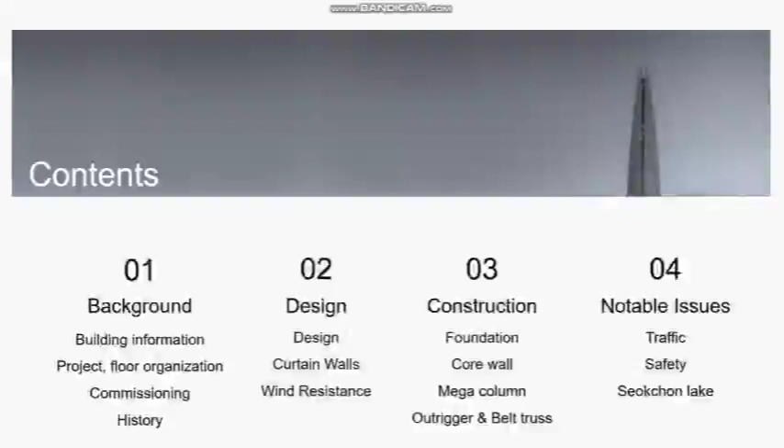Let me tell you the table of contents first. First, let me tell you about the background of the building, and another member will talk about the design and structure of the building and notable issues.

First, the background of the building. Let me tell you why we chose Lotte Tower. Lotte Tower is the 5th tallest building in the world and the tallest building in Korea. And I thought I could study many construction skills as a skyscraper.

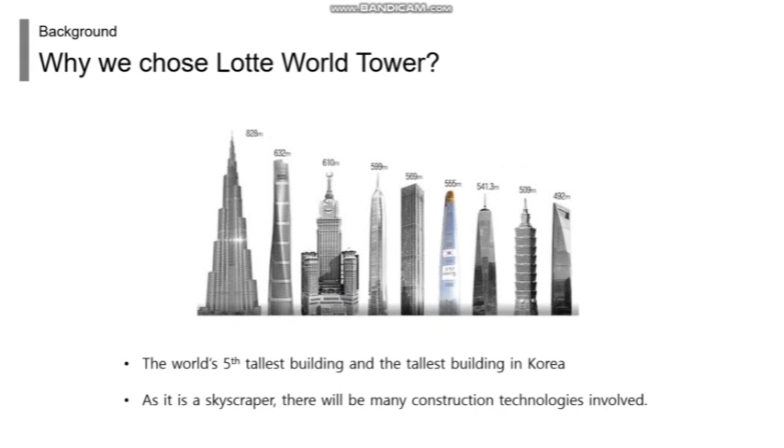Next is the basic information of the building. The building is located in Songpagu, Seoul and was built for a total of 6 years. And it is designed by Kohn Pedersen Fox.

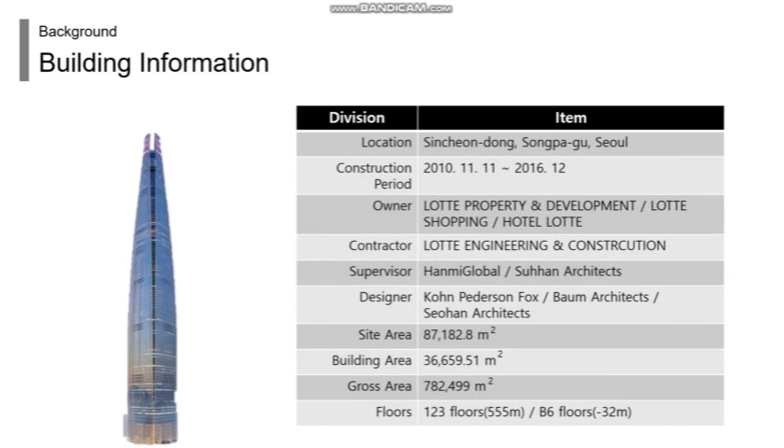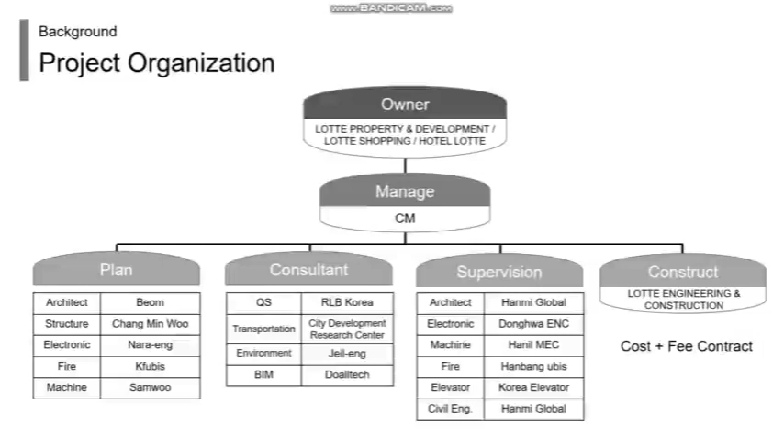Next, I'll talk about the project organization. This table shows who the owner and the manager are and which companies are responsible for plan, consultant, supervision, and construction under them.

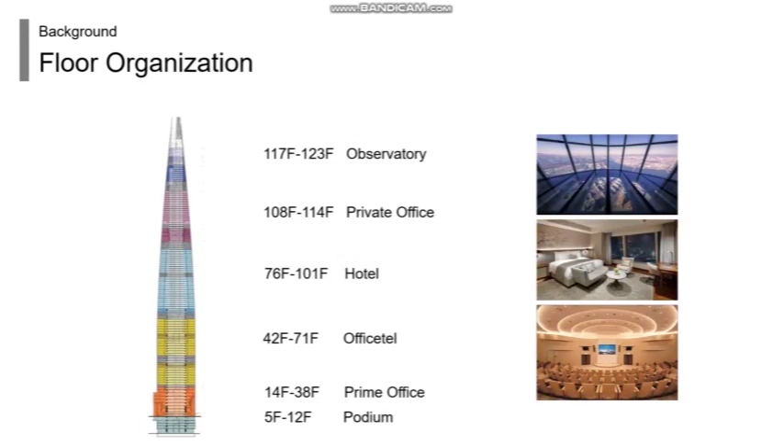Let me tell you about the floor organization. First, if you look from downstairs up to the 12th floor, there is a lobby and complex service space, and above that, there is an office. From the 42nd floor, there is an officetel there, and above it is a hotel and private office. The last section consists of an observatory. So, Lotte Tower has 123 floors and 6 floors underground.

Next, I'll talk about the history of Lotte Tower. First, let me tell you the history of building permit. In 1987, Lotte purchased the site of Jamsil in Songpagu, Seoul.

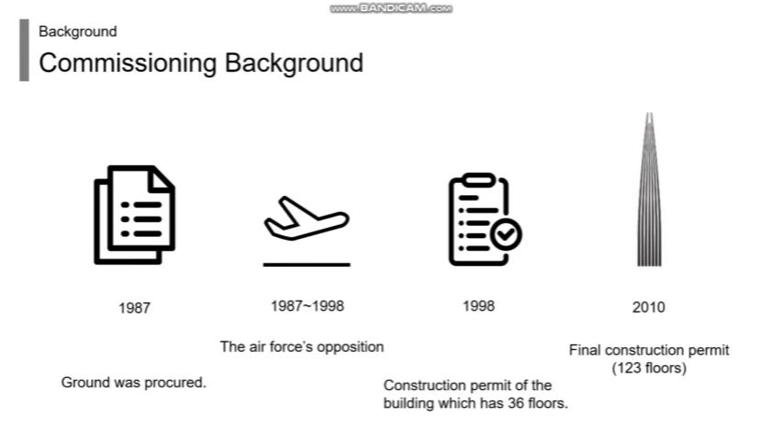However, construction failed in 1994 due to runway problems at Seoul Airport. Then, in 1998, Songpagu office granted a 36-story building permit. But in 2002, the Ministry of National Defense opposed the construction of the 112th floor. Finally, in 2006, the Seoul Metropolitan Government approved the construction of 555 meters, and in 2010, Songpagu authorized the construction.

And this is about the construction process after the final permit. First, we will start the mat foundation in 2011 and start the construction of the frame in earnest in 2012. Next year, install the outrigger and belt truss.

In 2014, it will surpass 305 meters and 410 meters in 2015. Eventually, in late 2015, the topping out ceremony will be completed in 2016 with the last beam raised to 123 stories. So I talked about the history of Lotte Tower's permit process to completion after construction process.

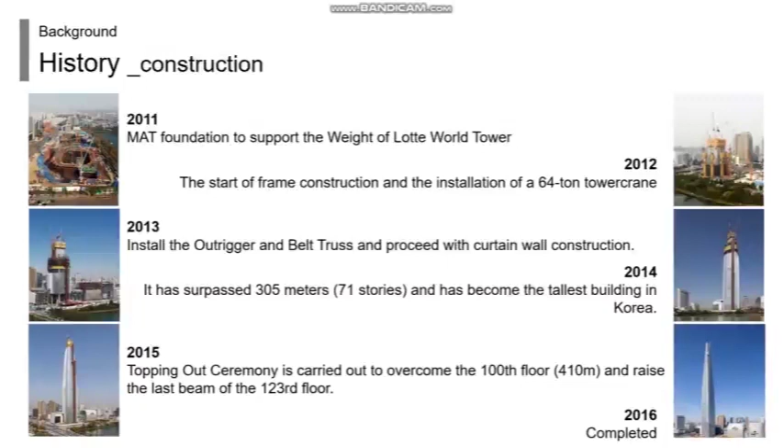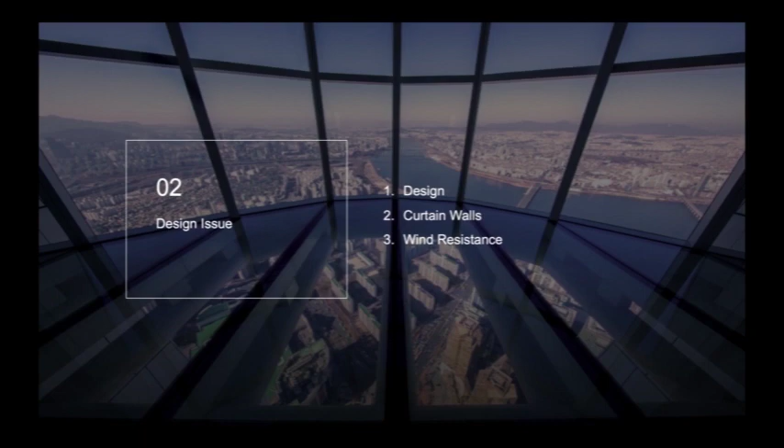This is Intang, and from now on, let me tell you about design issues. First, Lotte Tower's appearance is motivated by the shape of pottery and brush.

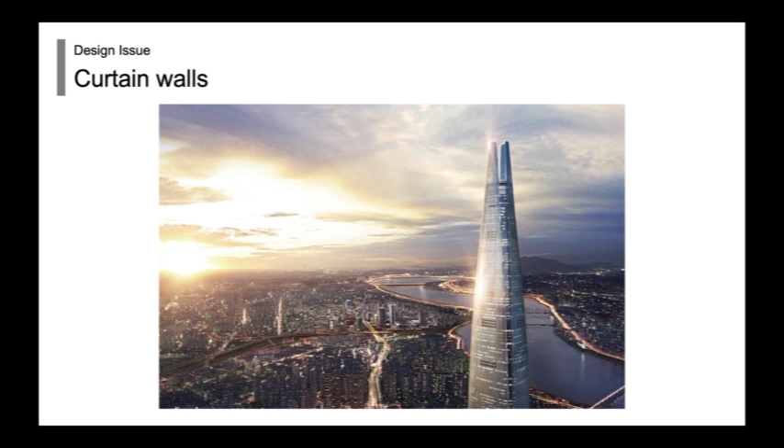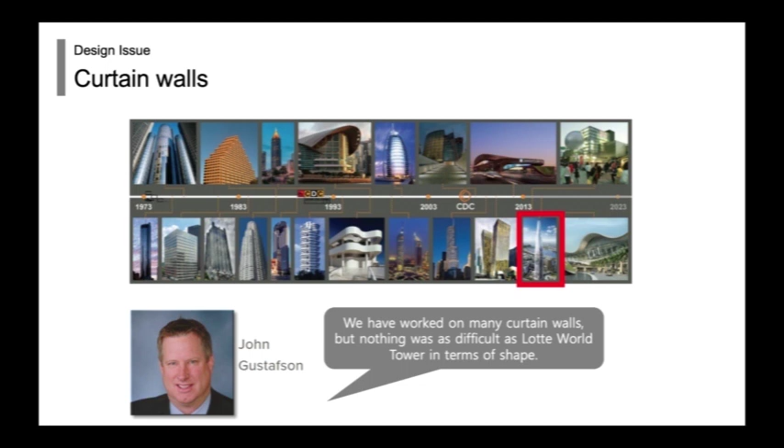So, to express the soft line and 2 lines of notch section, a lot of curtain walls are used. John Gustafson, president of Curtain Wall Consulting, said that he had worked on many curtain walls, but nothing was as difficult as Lotte Tower in terms of shape.

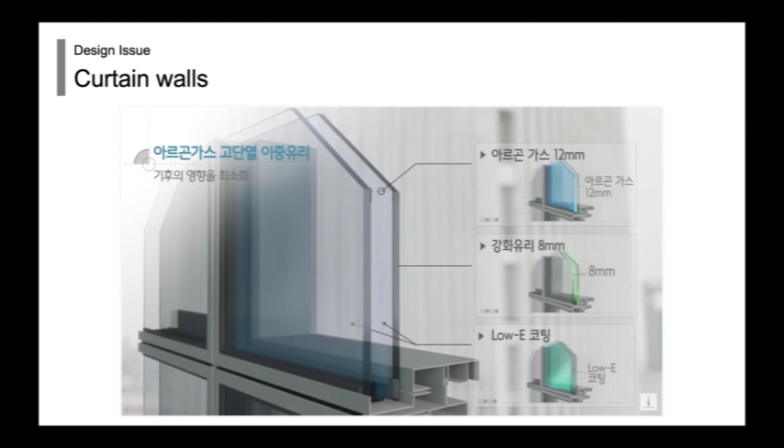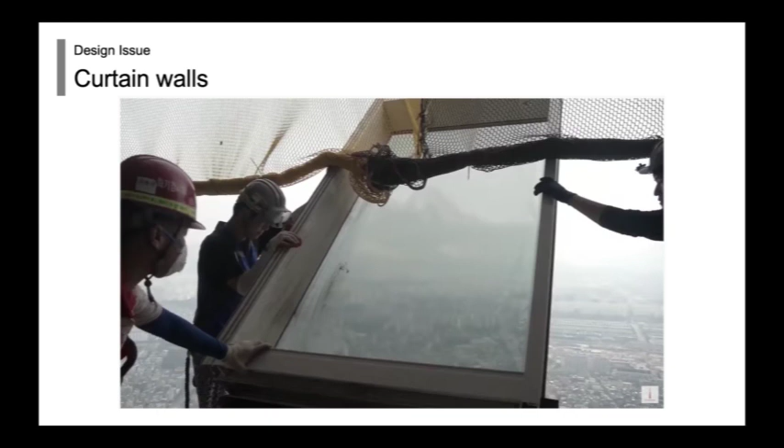The curtain wall has 12 mm of argon gas, 8 mm of tempered glass, and Low-E coating, which makes it strong and keep the energy inside. And there are 21,000 units that weigh as much as 600 kilograms. What's more surprising is that 17,000 of these shapes are all different.

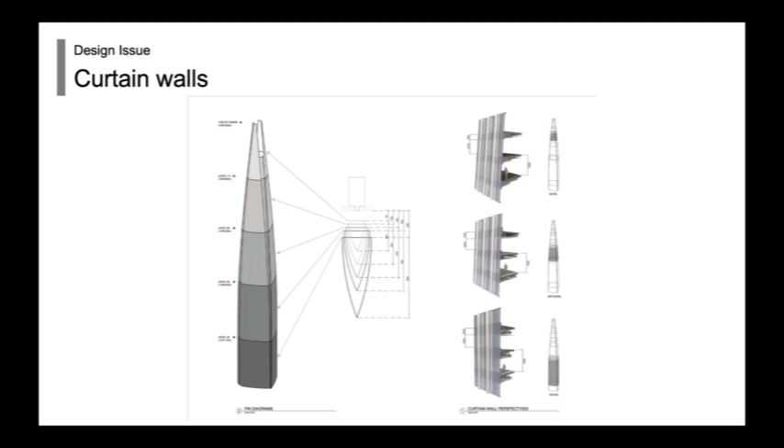As you can see in the picture, as the building is sloping upwards, all the points of the unit are marked on the entire floor of the slope section depending on the weight, width, and corner angle of the unit, which requires a high level of precision construction.

And another design issue is wind resistance design. Lotte World Tower was designed to withstand wind speeds of 128 meters per second. A series of wind tunnel tests were conducted, and the results were reflected in the structure design.

According to a research paper, after the 50% schematic design stage, a high-frequency force balance test was conducted, and the analysis was done twice at the end of the design development and after the 60% DD stage. During the 90% DD stage, when most of the dynamic properties were identified, an additional aeroelastic model wind tunnel study was conducted after the 50% SD stage and after the 90% DD stage, respectively.

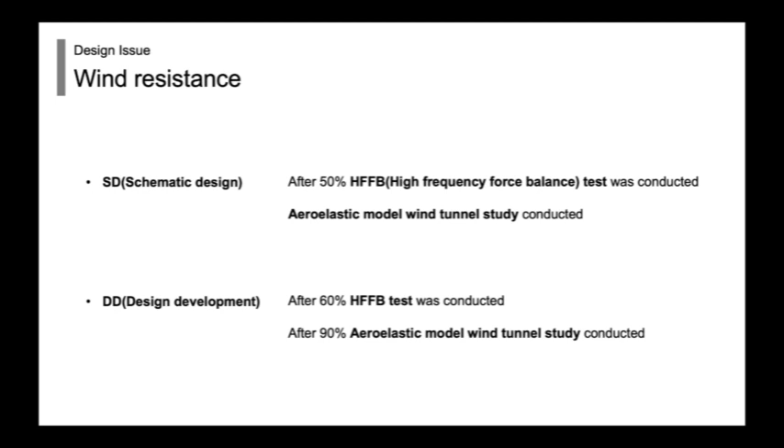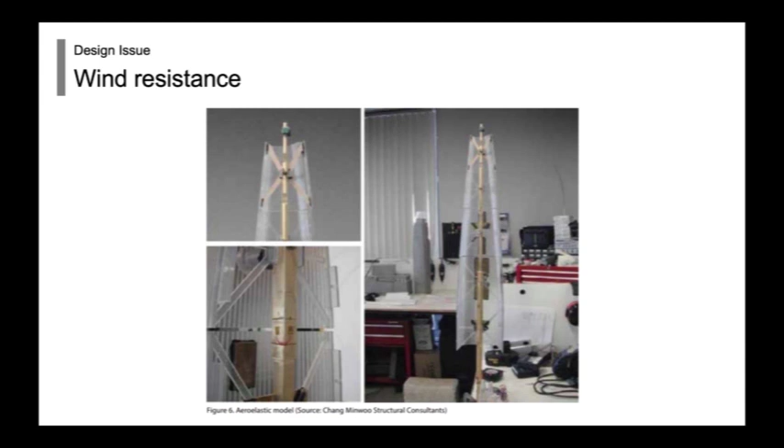The wind load calculated by the aeroelastic model showed approximately 17 to 22% lower than that by the HFFB. Base shears also came out about 8% below the HFFB. In the expert's view, the aeroelastic model study is a more preferred process. So, as a result, Lotte World Tower is satisfied with its acceleration limit and torsional velocity limit.

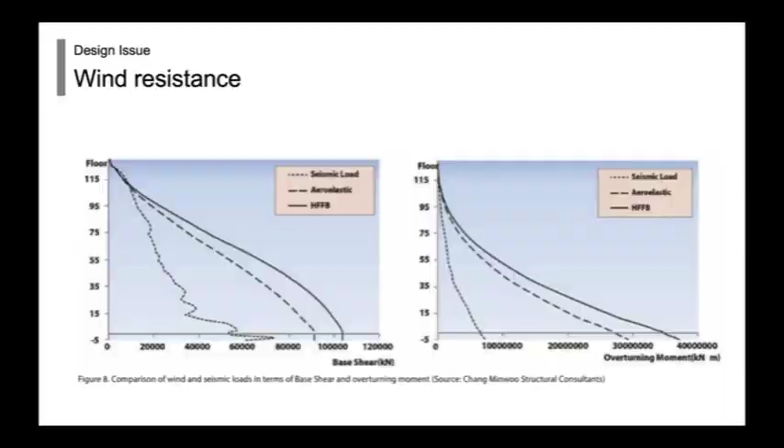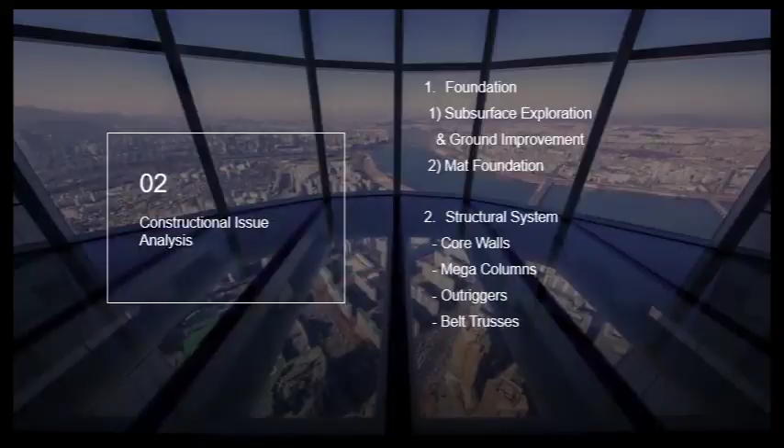Before starting the foundation construction process of Lotte World Tower, subsurface exploration was carried out. And then ground improvement work was carried out. The construction team dug under 38 meters and carried out ground improvement work by driving 108 PRD piles that have 1 meter of diameter onto these bedrocks. And these cast-in-place piles have 60 megapascal strength.

The main purpose of this work was to prevent subsidence of foundation and to reduce unequal settlement rate.

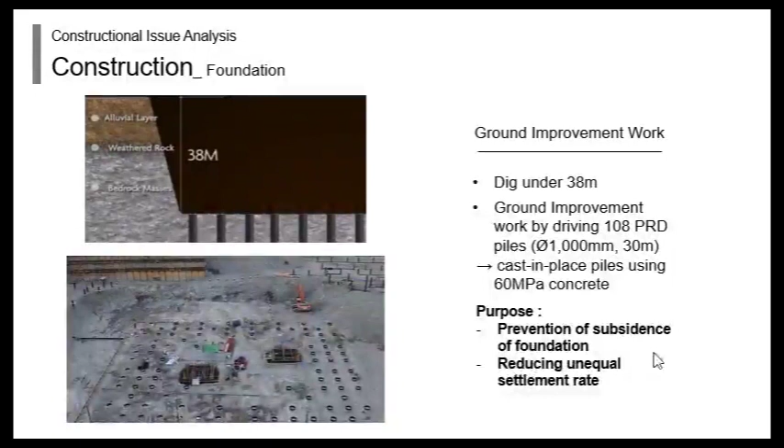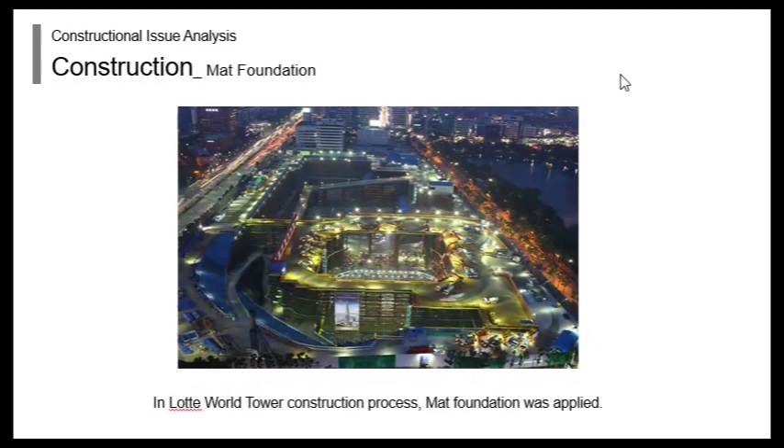After ground improvement work, foundation process was carried out. In Lotte World Tower, mat foundation was applied.

Before talking about Lotte World Tower's case, I will explain mat foundation. Mat foundation is a footing which has a continuous thick concrete slab on the soil that extends the entire footprint of the building and increases the soil bearing capacity. Since it can support the entire building loads and safely transfer it to the ground, it is suitable for heavy building construction or ground that has low bearing capacity. The main advantage of this method is that it is a stable foundation against unequal settlement.

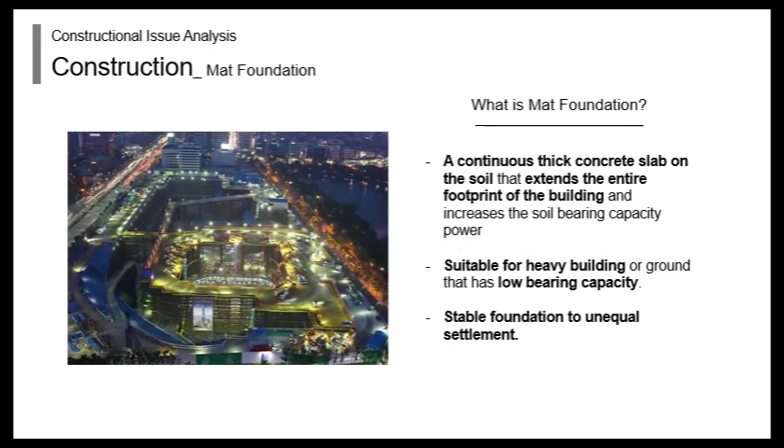This is an introduction of the mat foundation applied in Lotte World Tower. Its scale is 32,000 cubic meters and its casting time was about 30 hours. Consecutive concrete casting was applied during the process, and especially ultra-low heat concrete was used, which has 50 megapascal strength, and lastly, large high-tension deformed bars were used.

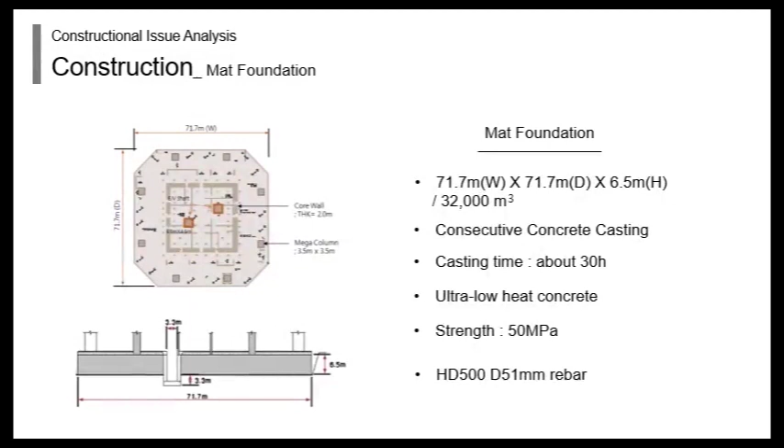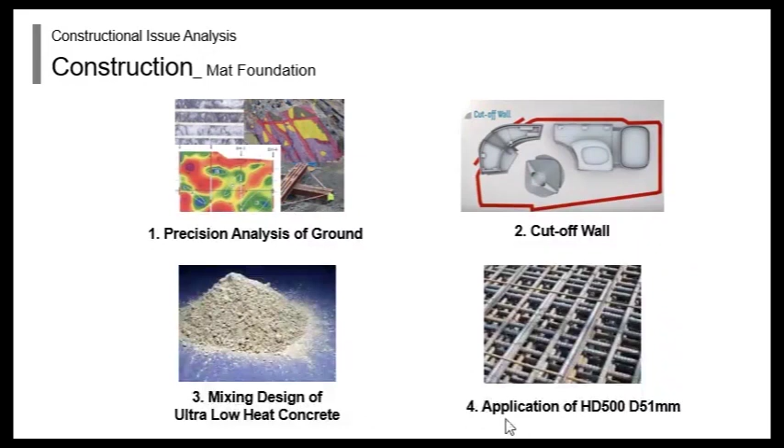In this process, mainly four methods were applied: first, precision analysis of ground; second, cut-off wall; third, design of ultra-low heat concrete; and lastly, application of high-tension deformed bars.

Before foundation construction, precision analysis of ground was taking place. This process was really important because Lotte World Tower is a high-rise building, and the results of this analysis can affect subsequent processes such as selection of ground improvement method and foundation method.

In this process, four analysis methods were carried out. First, core sampling analysis was taking place so the construction team could know the physical features of the ground. Second, face mapping process was carried out, the purpose being to evaluate the surface of the site's bedrock. This mapping process was collaborative work between Korean teams and foreign experts.

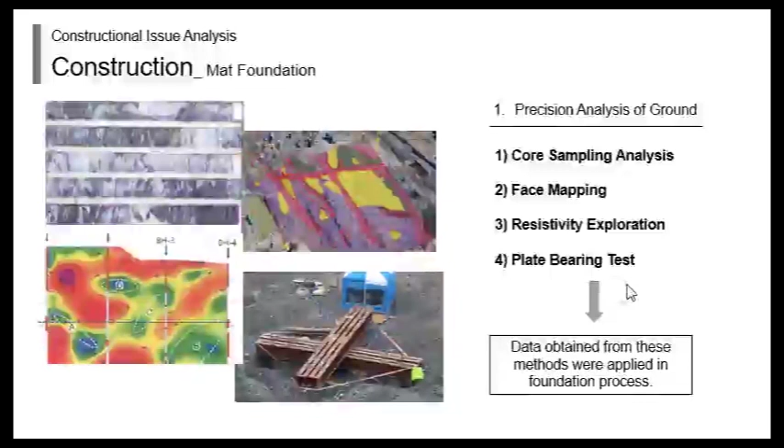Third, resistivity exploration was carried out so the construction team could assume the possibility of endurance-decreasing factors of the RC concrete foundation. And lastly, plate bearing tests that can measure the endurance of bedrock were carried out. Data obtained from these methods were applied in the foundation process.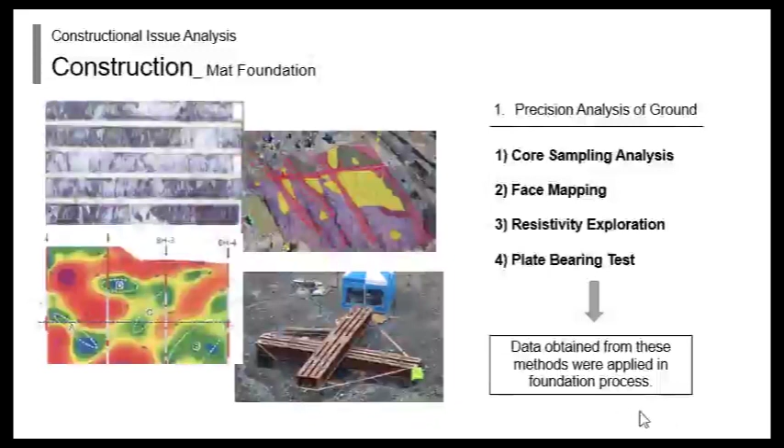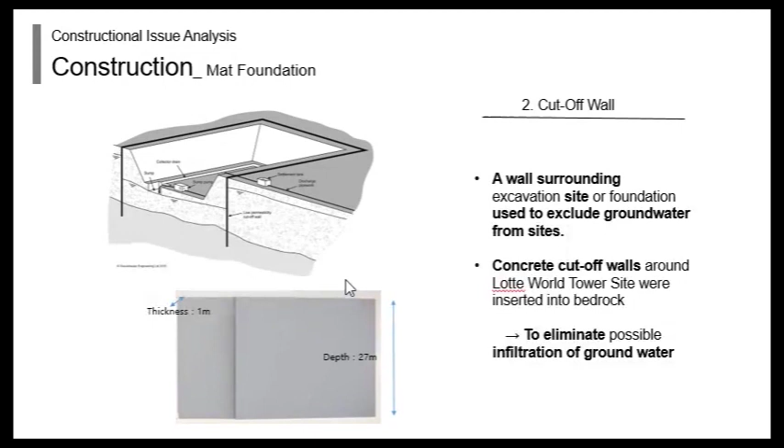The second main process of mat foundation was inserting a cut-off wall around the Lotte World Tower site. A cut-off wall is a wall surrounding an excavation or foundation site used to exclude groundwater. It can be made in various ways such as steel sheet piling or concrete diaphragm walls. In this case, concrete cut-off walls around the Lotte World Tower site were inserted into bedrock to eliminate any possible infiltration of groundwater. These walls have 27 meters of depth and 1 meter of thickness.

This is a short video of the cut-off wall surrounding the building. As you can see, these walls surround the entire building to keep it safe from the ground, like this.

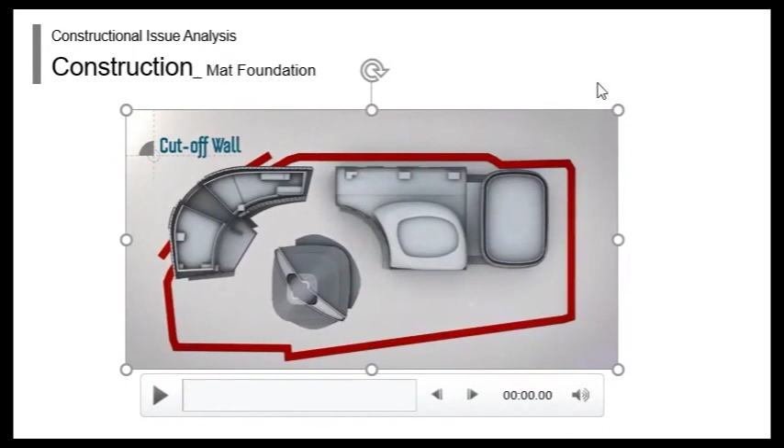The third main process of mat foundation was the mixing design of ultra-low heat concrete. Since Lotte World Tower was a high-rise building of tremendous scale, consecutive concrete casting was needed. In this mass concrete work, the chemical reaction called hydration can cause thermal cracking, which can lower concrete performance. So there were rigid requirements for mass concrete in the foundation.

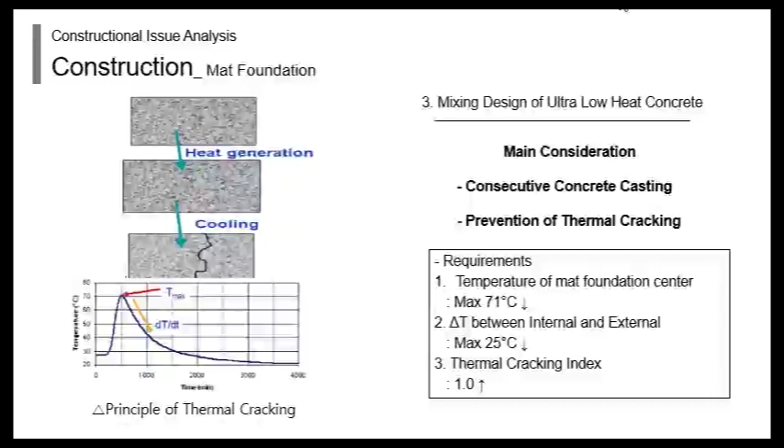To satisfy these requirements, Lotte E&C and Asia Cement collaborated, and after two years of work, a special ultra-low heat cement mix was invented. According to experiments measuring hydration temperature, concrete using this cement fulfilled the design strength of 50 megapascal and had a 50% lower maximum temperature compared to normal concrete, fulfilling other design requirements. This special ultra-low heat cement was used throughout the entire mat foundation process.

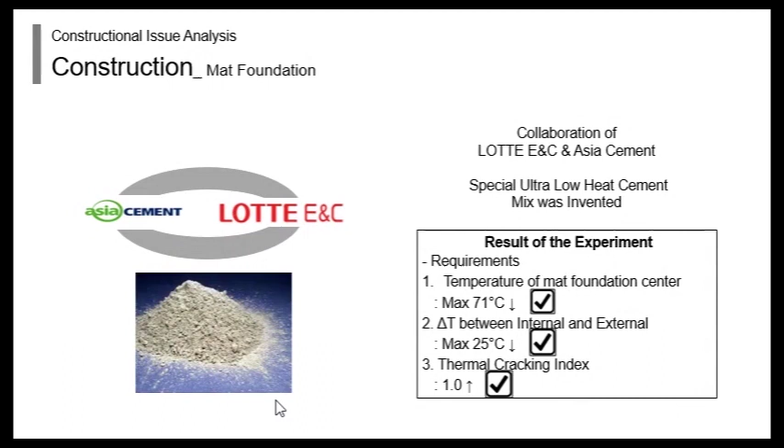Finally, the construction team used super high-tension deformed bars in the mat foundation. If we sort deformed bars by yield strength value, there are mainly three types: HD, SHD, and UHD. Among these, SHD bars with 51 millimeter diameters were used.

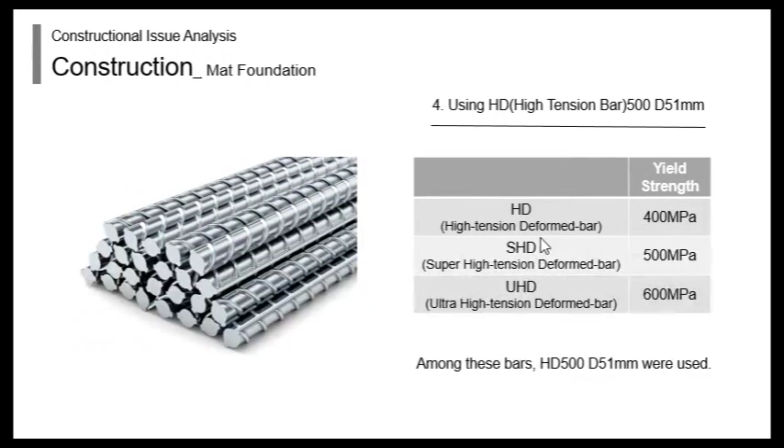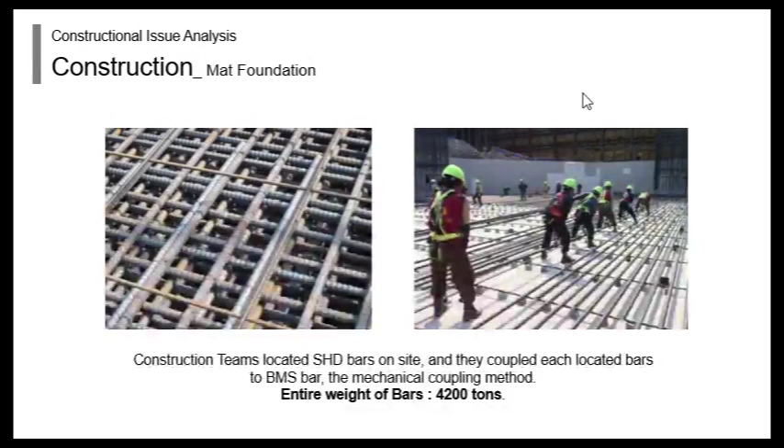Construction teams located SHD bars on site, and coupled each located bar using BMS bar, a mechanical coupling method for steel bars. The entire weight of the bars was 4,200 tons.

Thanks to the application of these methods, the mat foundation of Lotte World Tower was successfully constructed. It is roughly 1.8 times thicker than that of Burj Khalifa, using 80,000 tons of high-strength concrete, more than 2.5 times the amount used in Burj Khalifa.

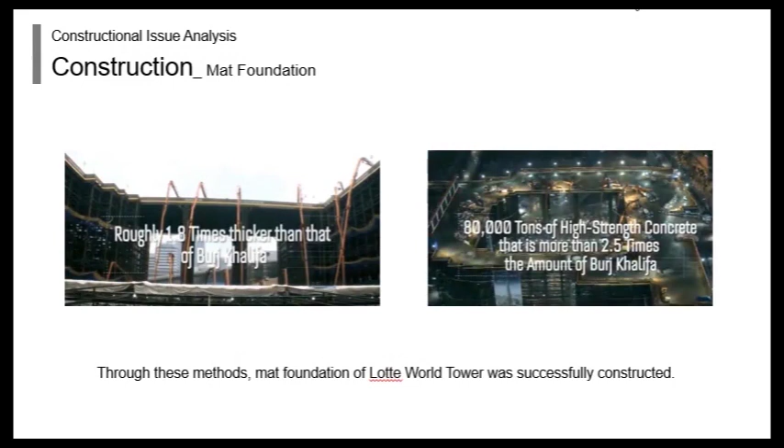From now on, I'm going to talk about the structural system of Lotte World Tower. There are mainly two systems: gravity resistance system and lateral force resistance system. Although these systems work together and cannot take each force separately, they can be sorted as specializing in each force. There are core walls and mega columns that specialize in gravity resistance, and outriggers and belt trusses that specialize in lateral force resistance.

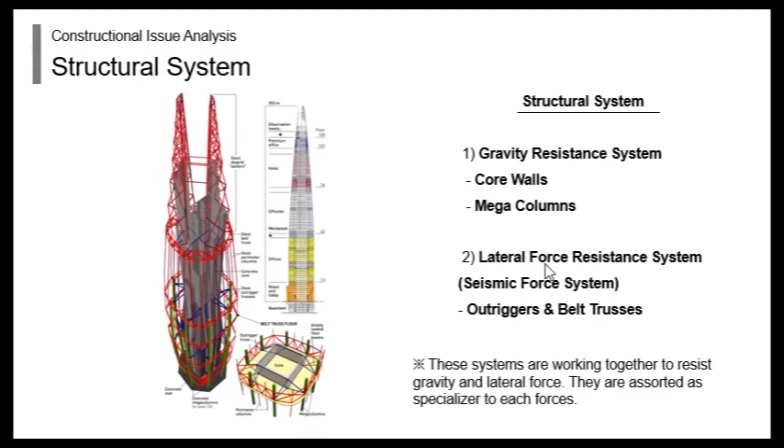First, let's talk about the gravity resistance system. As I mentioned, there are core walls and 8 mega columns that have an RC structure. This is a picture of those systems, and this is a table that shows the weight of each system's members.

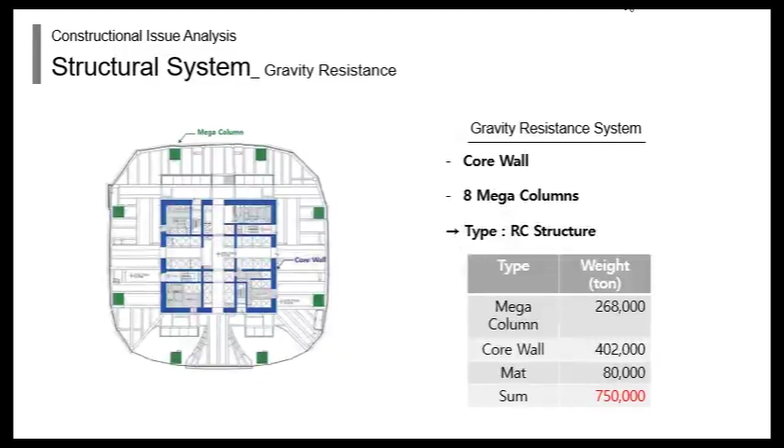When we see this structure in cross-section, you can see that these system members have different thickness on different floors. You can tell that toward the upper side of the building, the thickness of gravity resistance materials gets narrower. Since these are RC structures, they have between 40 and 80 megapascal strength. Concrete with more than 40 megapascal strength is called high strength concrete, but when you build a building using this kind of concrete, prevention for spalling failures should be considered.

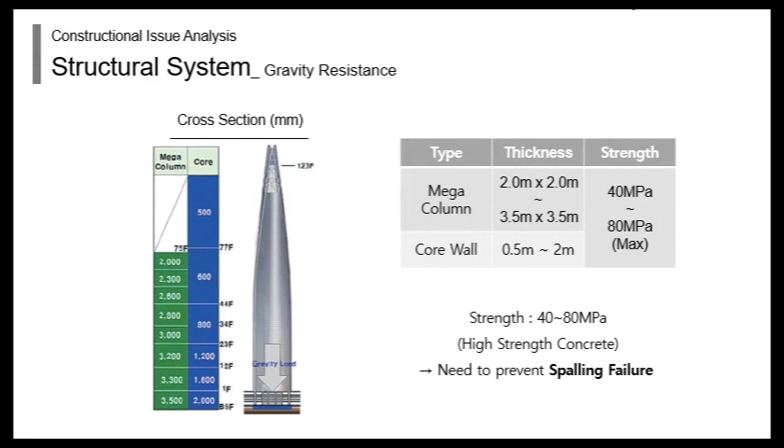Spalling failure is the process of surface failure in which flakes of concrete break off in fire accidents because of internal water in the concrete. For high-strength concrete, spalling failure can happen easily due to its dense structure. The main problem is that structural performance of concrete gets lower and can cause ultimate failure, meaning collapse of the entire building. In the Lotte World Tower case, polymix fibers were added to the concrete to prevent spalling failure by making tiny gaps that act as exits for water vapor.

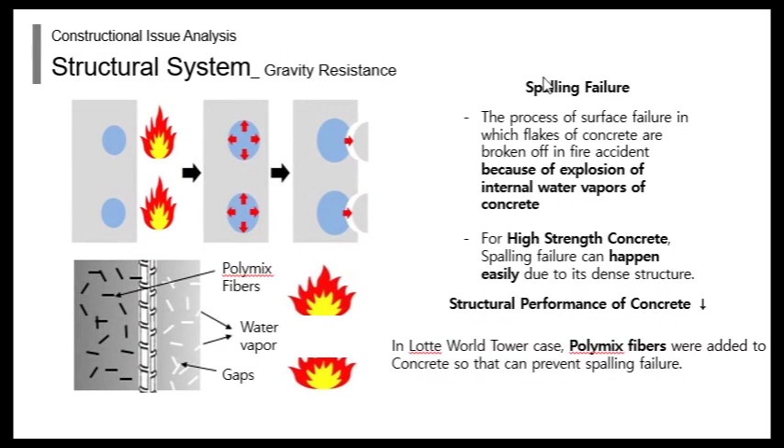This is an explanation of the gravity resistance system. Lotte World Tower's gravity resistance system consists of core walls located in the center up to the 123rd floor, 8 mega columns located around the perimeter of the building, and deck slabs with steel beams. These members are connected to each other and can disperse gravity loads effectively. In fact, core walls support 60% of building loads and mega columns support 40% of building loads.

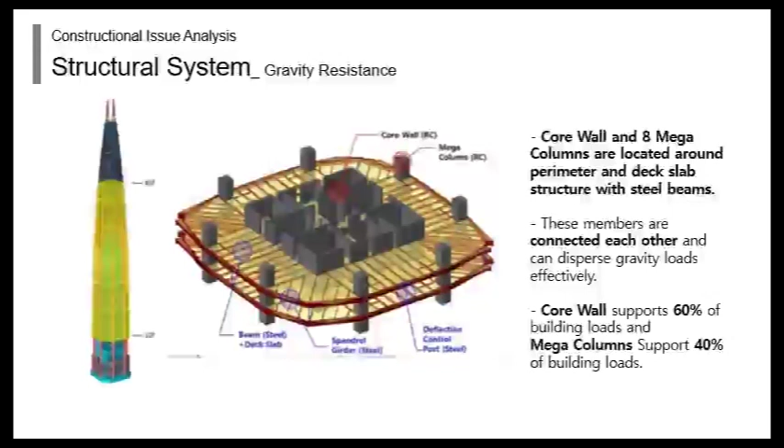As mentioned by Hyunmin, according to design intent, lateral loads on the building are resisted by the RC core walls, mega columns, outrigger, and belt trusses. Among them, I'm going to tell you about the lateral load resisting systems applied in the building: outrigger and belt truss. Outrigger systems function by tying together two structural systems, typically a core system and a perimeter system.

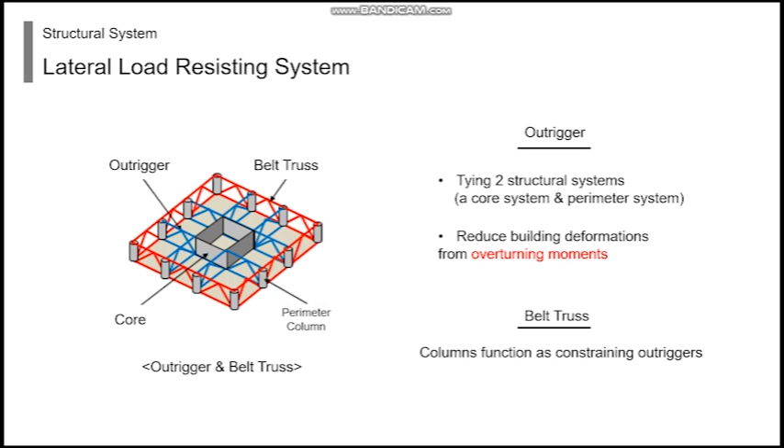An outrigger system engages perimeter columns to efficiently reduce building deformations from overturning moments and the resulting lateral displacements at upper floors. By installing belt trusses, not only the columns located at the end of the outrigger, but also other columns can function to constrain the outriggers. Also, belt trusses and outrigger trusses are made of steel.

During the SD phase, it was originally planned to have 3 sets of outriggers and 6 sets of belt trusses. During the DD phase, a comparative study of the lateral load resistance ratios of the outrigger belt trusses and RC core was conducted. As a result, two sets of outriggers and two sets of belt trusses were identified as the most optimal solution for the lateral load resisting system.

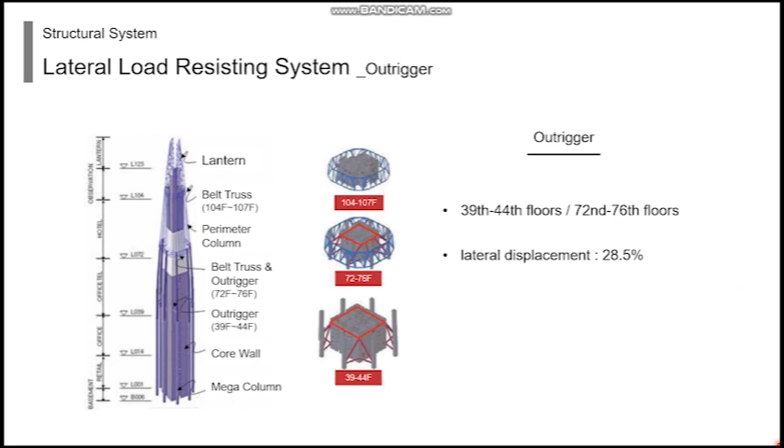It was found to be inefficient to have many sets of outriggers and belt trusses in the system, so the plan was changed. Two sets of outriggers are installed at the 39th to 44th floors and the 72nd to 76th floors. The contribution of outriggers to controlling lateral displacement is 28.5%.

Steel box B2, like this one, is used for outrigger diagonal members. Since they mainly support axial loads, the web thickness of the steel box was increased to 80 mm, and the flange thickness was decreased to 20 mm.

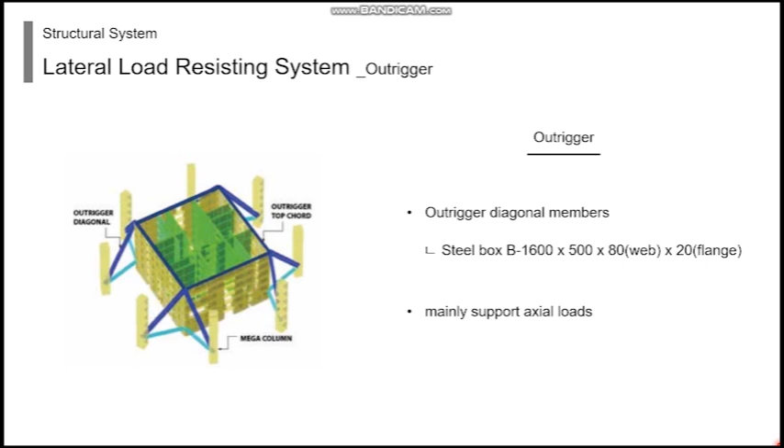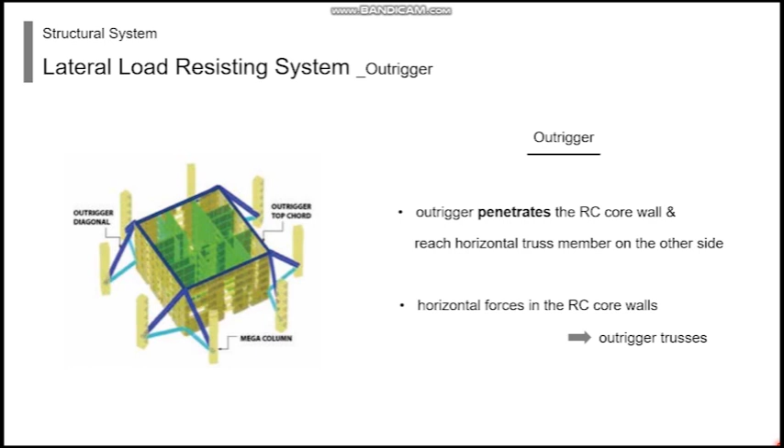The top chord of the outrigger penetrates the RC core wall and reaches the horizontal truss member on the other side, so that horizontal forces in the RC core walls can be easily transferred to the outrigger trusses.

For the design of the connections between the outrigger members and the mega columns, it was intended that an outrigger diagonal member and a horizontal member be connected at a column-embedded connecting post. Horizontal forces to the outrigger diagonal member are supported by the bottom chord, and the end plate supports vertical forces to the diagonal member.

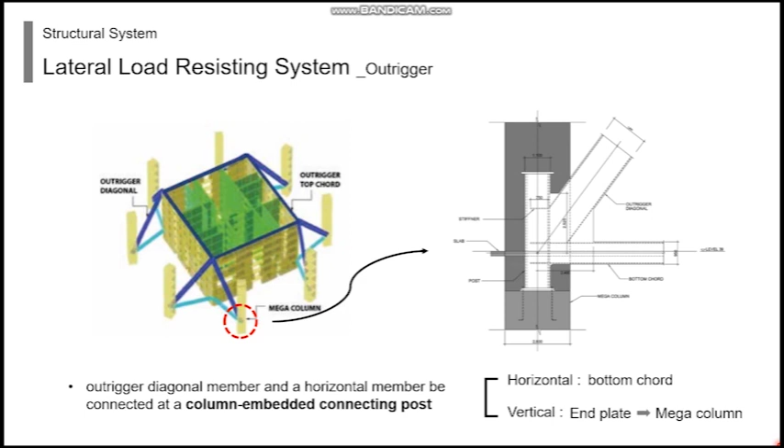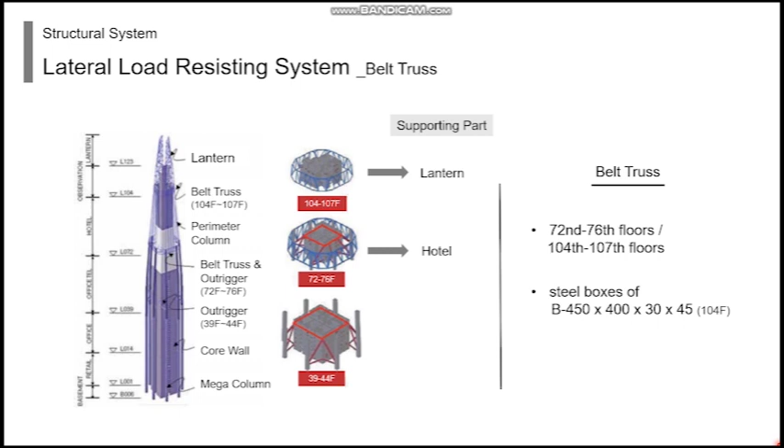Next is about belt truss. The two sets of belt trusses are placed at floors whose height is equal to 3 or 4 stories. The upper belt truss supports the uppermost lantern structure, and the lower belt truss supports the hotel columns. It was proved that the belt truss is more effective than the outrigger truss at that location.

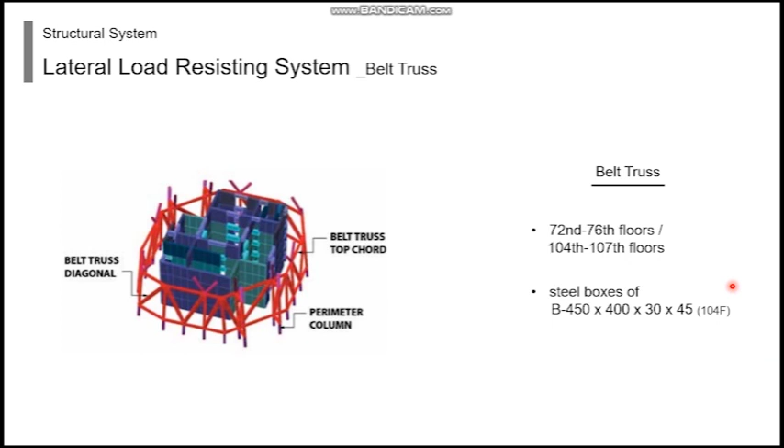The upper chords and the bottom chords of the belt trusses at the 104th floor are steel boxes of B2, this one. And now, about the connection of the belt truss.

If the belt trusses supporting the hotel columns are installed along the outside of the mega columns, the mega columns can be constructed continuously regardless of the belt truss construction process.

So the belt trusses are fabricated through field welding of pre-assembled trusses with embedded plates on the outside of the mega columns. To reduce deformation of the 14.4 meter high embedded plates caused by axial loads, and to design proper dowel bars, shear transfer bearing plates are needed in every space between dowels.

The embedded plate is installed on only one side of the mega column, but in some floor levels, the plate would enclose all 4 sides of the mega column. We will study more about the connection of outrigger and belt truss, and also about spandrel girder, next week.

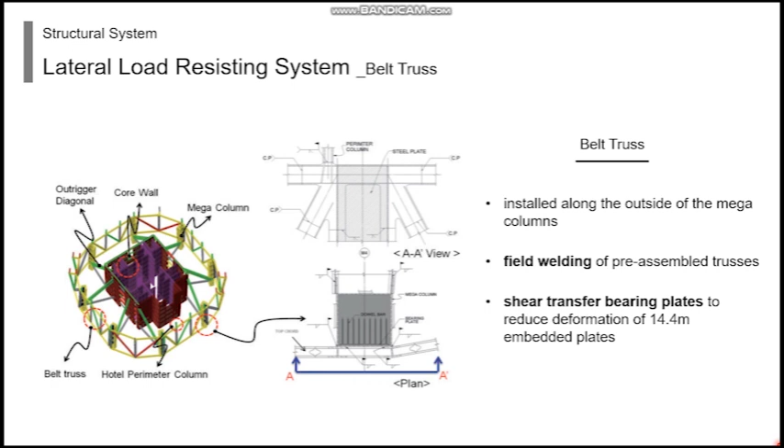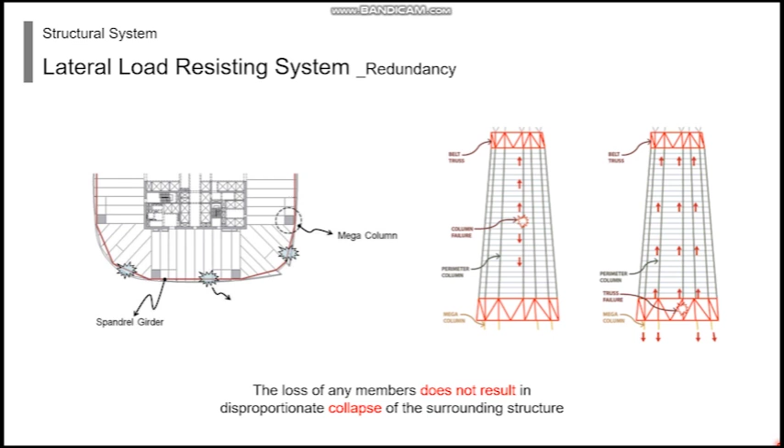The important members such as spandrel girders, belt trusses, and hotel steel columns have redundancies to avoid a sudden collapse when one of these members loses its capacity in case of fire or unexpected impact. It is designed such that the loss of any members does not result in disproportionate collapse of the surrounding structure.

Hello, I'm Jae-seok Choi. I would like to talk about notable issues. I searched for in 3 categories.

First is traffic congestion. Jamsil, where Lotte World Tower is located, is one of the city's major traffic arteries, and people are experiencing inconvenience due to heavy traffic. Lotte has invested about 526 billion won, that's 20% of construction cost, in the transportation improvement project.

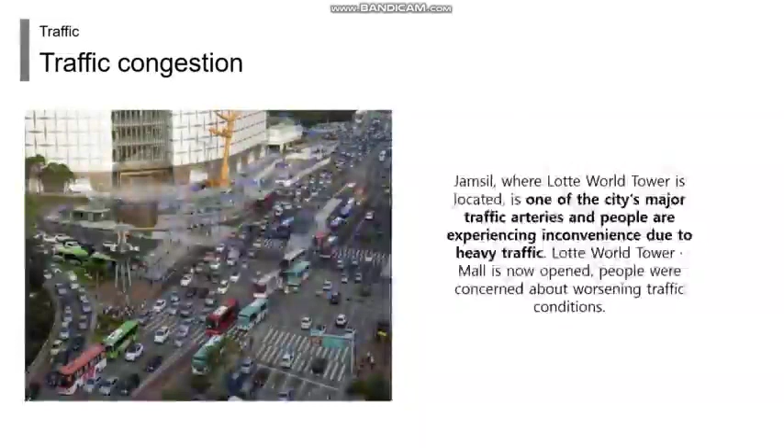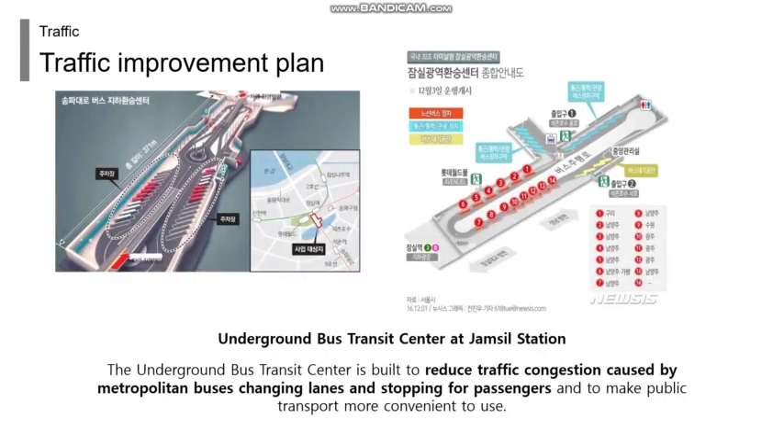I searched what is included in that project. First is underground bus transit center. It reduces traffic congestion caused by metropolitan buses changing lanes and stopping for passengers, and makes public transport more convenient to use. Second is underground roadway at Jamsil Gil.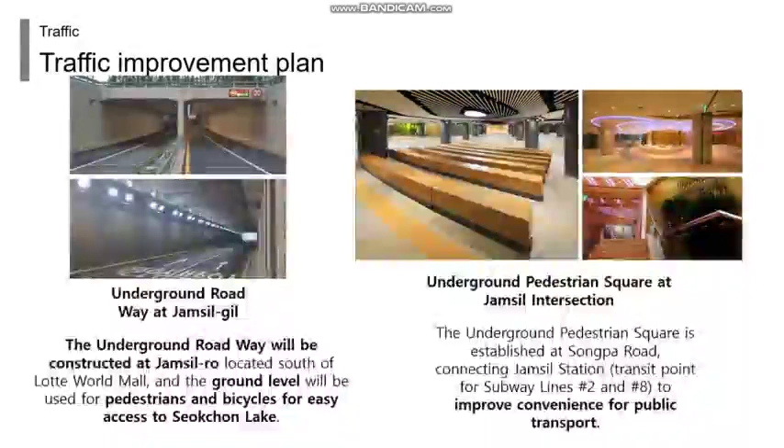It will be constructed at Jamsil-ro, and the ground level will be used for pedestrians and bicycles for easy access to Seokchon Lake. Third is underground pedestrian square at Jamsil intersection. It improves convenience for public transport.

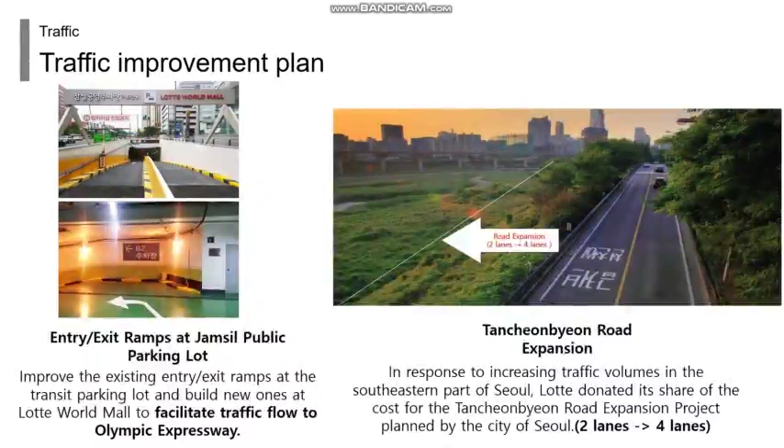Fourth is entry and exit ramps at Jamsil public parking lot. It facilitates traffic flow to Olympic Expressway. Fifth is Tancheonbyeon road expansion. Lotte donated costs for the Tancheonbyeon expansion project planned.

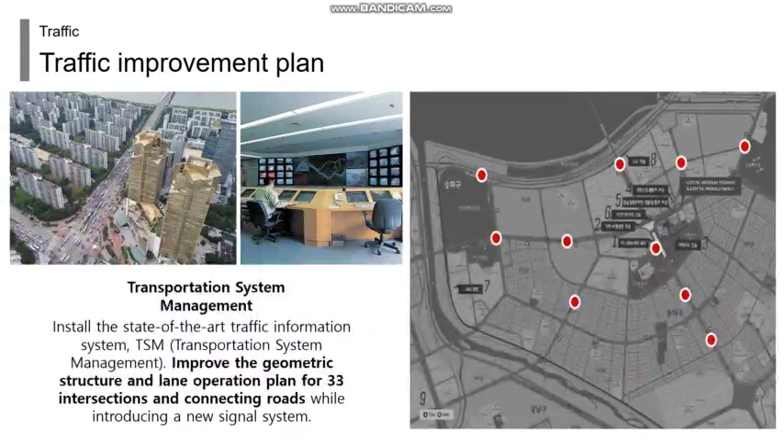The last is transportation system management. It improves the geometric structure and lane operation plan for 33 intersections and connecting roads.

Next is safety issues. It was confirmed that Lotte World Tower had several safety issues during construction, and those issues were seen as a concern similar to the second collapse of Sampoong department store. The Sampoong department store collapse was a structural failure because of poor construction and over-construction. The collapse of the building was actually predictable.

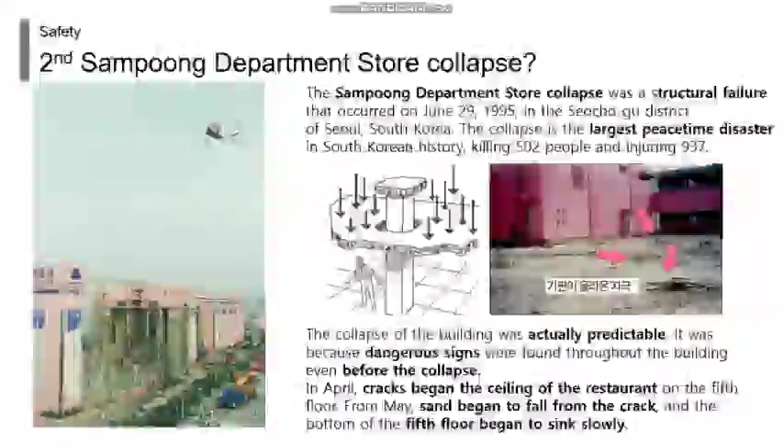In April, cracks began in the ceiling of the restaurant. From May, sand began to fall from the crack, and the bottom of the 5th floor began to sink slowly. These same types of cracks also occurred during the construction of Lotte World Tower.

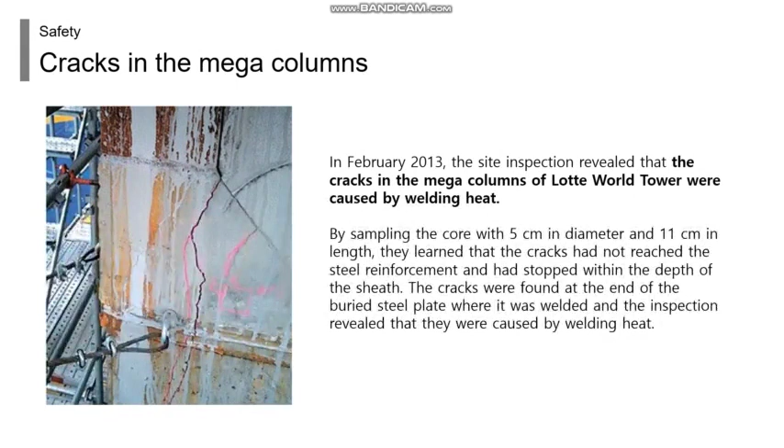First is cracks in mega columns. In February 2013, the site inspection revealed that the cracks in the mega columns of Lotte World Tower were caused by welding heat.

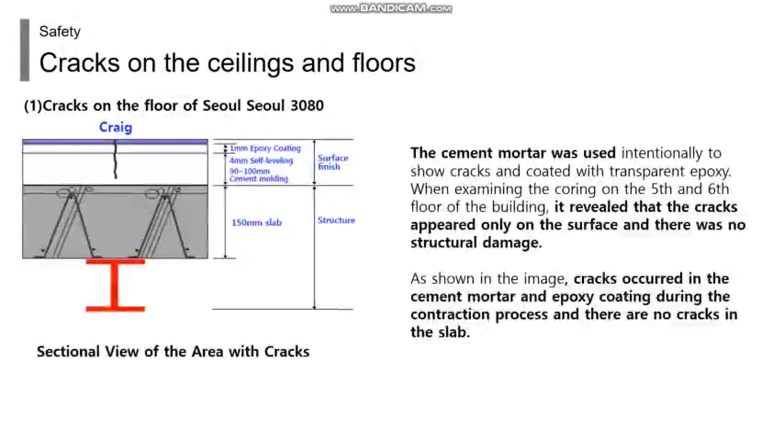Second is cracks on the floor of Seoul 3080. As shown in the image, cracks occurred in the cement mortar and epoxy coating during the contraction process, and there are no cracks in the slab.

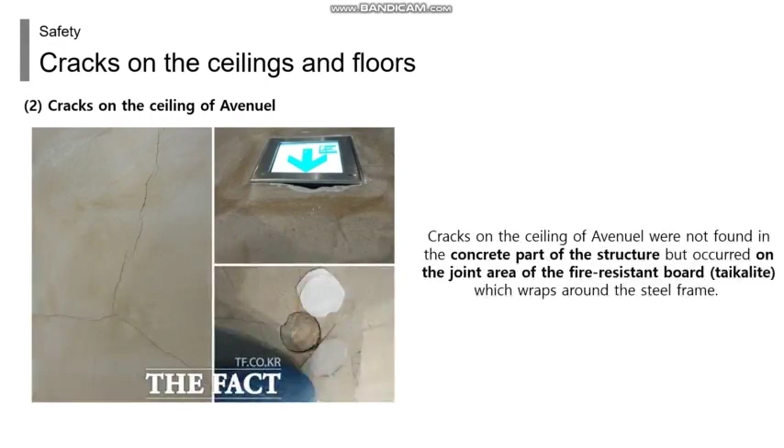Third is cracks on the ceiling of Avenuel. Cracks on the ceiling of Avenuel were not found in the concrete part of the structure, but occurred on the joint area of the fire-resistant board.

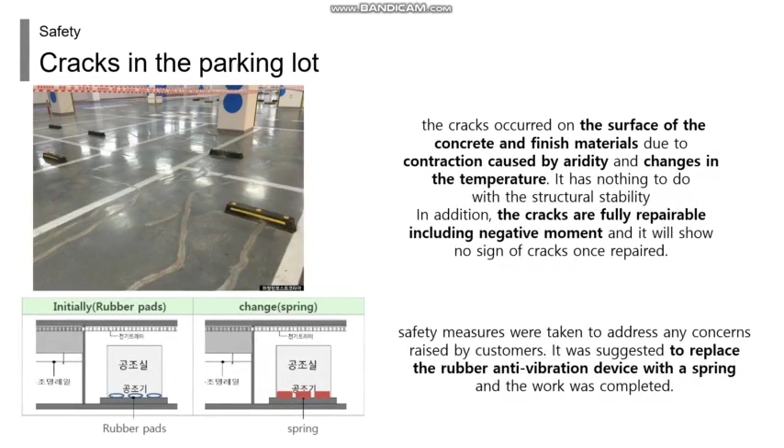The last is cracks in the parking lot. The cracks occurred on the surface of the concrete and finish materials due to contraction caused by aridity and change in temperature. The cracks are fully repairable, including negative moment.

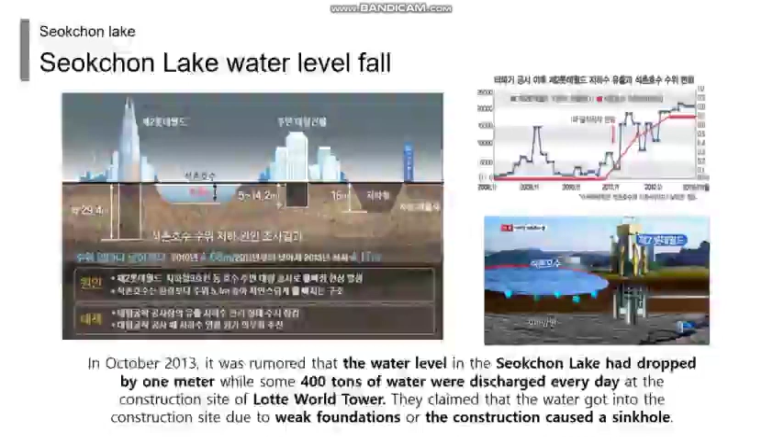Next is Seokchon Lake issues. In 2013, it was rumored that the water level in the Seokchon Lake had dropped by 1 meter, while some 400 tons of water were discharged every day at the construction site of Lotte World Tower.

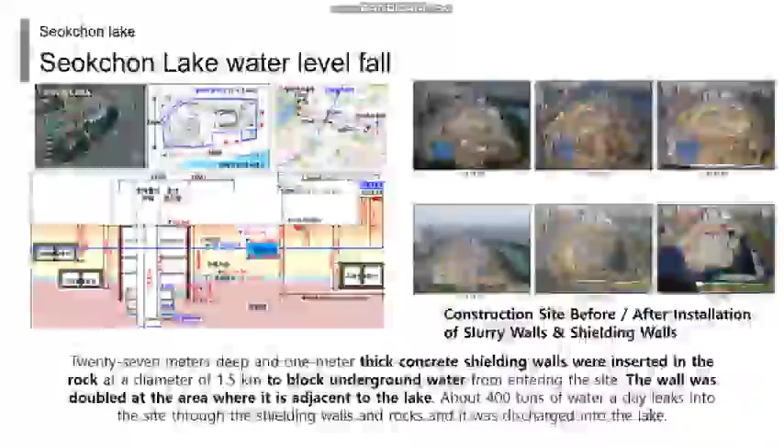But 27 meters deep and 1 meter thick concrete shielding walls were inserted at a diameter of 1.5 kilometers to block underground water from entering the site.

In 2014, a sinkhole phenomenon was discovered on the road around Lotte World. The sinkhole near Seokchon Lake turned out to be mainly caused by the subway line number 9 construction work, and it had nothing to do with Seokchon Lake.